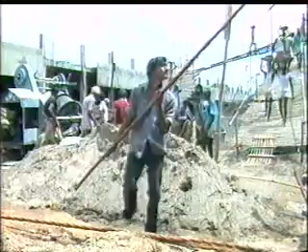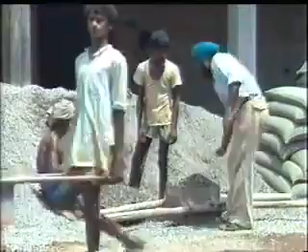Versatile and most useful modern construction material. To achieve the desired structural and functional properties of hardened cement concrete, its manufacture and properties during plastic stage need to be suitably controlled and checked.

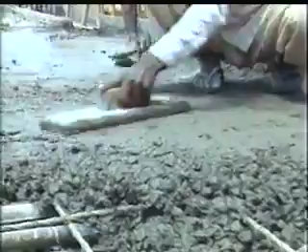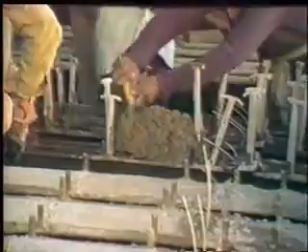The workability is the ease with which the concrete can be placed, molded, and compacted fully in its mold. More scientifically, the workability is that property of plastic concrete which determines the amount of useful internal work necessary to produce full compaction.

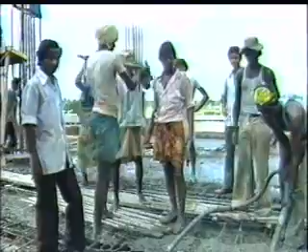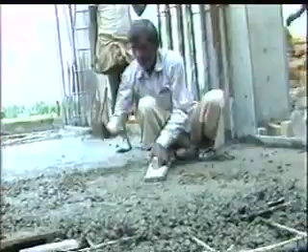Workability is defined as the property of plastic concrete which determines the amount of useful internal work necessary to produce full compaction of molded concrete without any segregation or bleeding. Good workability results in much better compaction and hence dense concrete with minimum air voids.

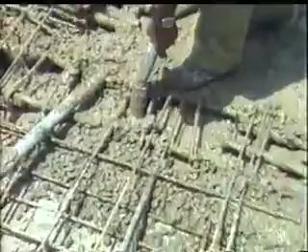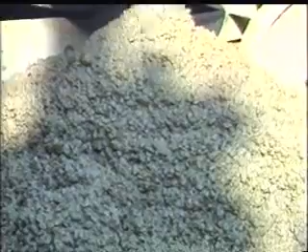The phenomenon of workability is associated with sub-concepts of ease of flow, which indicates flow characteristics of concrete. Prevention of harshness, which indicates surface finishing characteristics. Cohesiveness, that is, prevention of segregation, which indicates homogeneity of concrete.

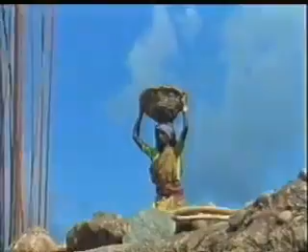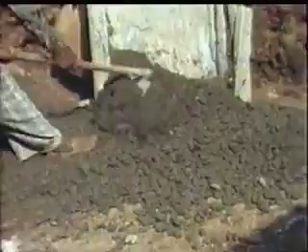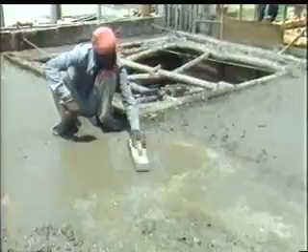Workable concrete mixes should not segregate. Improper handling leads to segregation. Prevention of bleeding, which shows oozing of water and cement slurry to surface. Good concrete mix should not bleed during compaction and finishing.

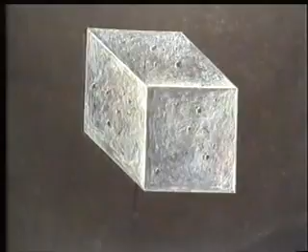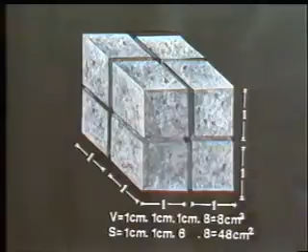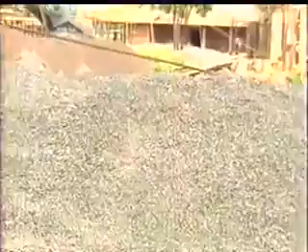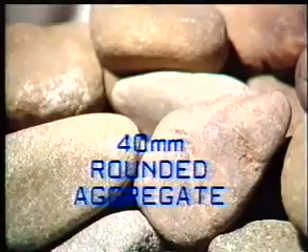The size, shape, texture, and grading of aggregate particles affect their surface area. Surface area per unit volume increases with the decrease in size. Crushed aggregate has more surface area compared to rounded aggregate per unit volume. Water used in making concrete lubricates the surface of aggregate. The quantity of water per unit volume affects the lubrication of aggregate particles and hence the workability.

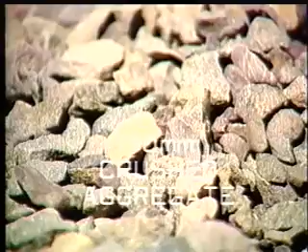Thus, the size, shape, texture and grading of aggregate and quantity of water affect the workability of concrete. For achieving the desired workability, the quantity of water is decided on the basis of size, shape, texture and grading zone of aggregate.

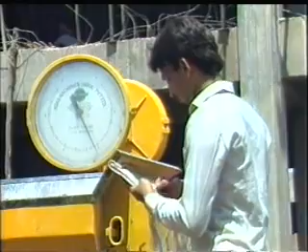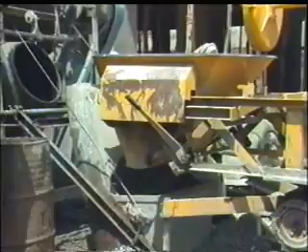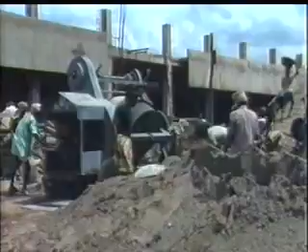To achieve the desired workability, adopt suitable aggregate to cement ratio and fine aggregate to coarse aggregate ratio depending on the sand grading zone, size, shape and grading of coarse aggregate. To achieve economy in the manufacture of concrete or higher yield, the proportion of sand should be just sufficient to produce cohesive concrete mix.

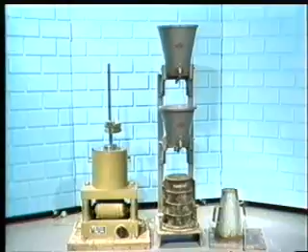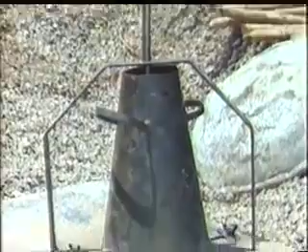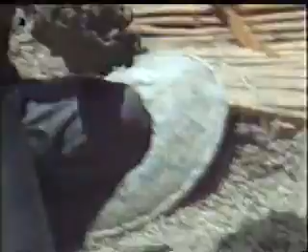A large number of tests are developed for the measurement of workability: slump test, compacting factor test, VB test. Slump test apparatus consists of a truncated cone having 100 mm top diameter, 200 mm bottom diameter and 300 mm height.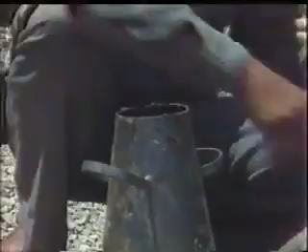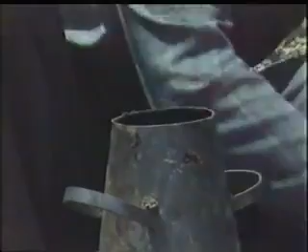The slump cone is filled with concrete mix in 3 layers, compacting each layer with 25 standard strokes of tamping rod.

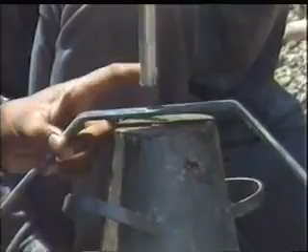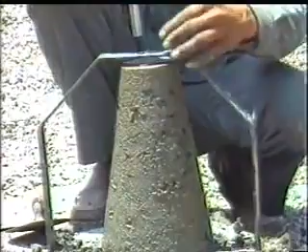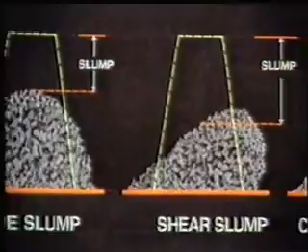The cone is lifted vertically without jerk and vertical subsidence of top concrete surface is measured from the original top face of the cone. Depending on the type of concrete mix, the slump may be true slump, shear slump or collapse slump. The slump test is ineffective for mixes of very low and very high workability.

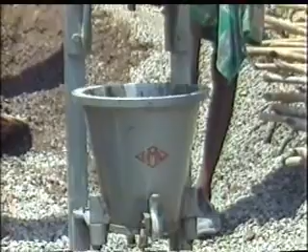Compacting factor test was evolved to relate the external work applied to the internal work required for compaction. This test is very useful, especially in dry mixes.

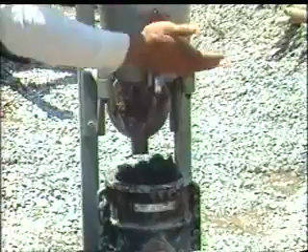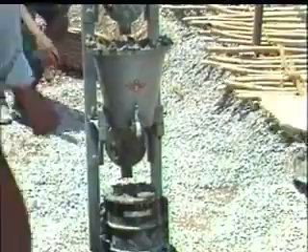The workability as the degree of compaction is expressed in terms of fraction obtained by dividing the observed weight of concrete allowed to fall in the standard cylinder through a standard height by the weight of concrete.

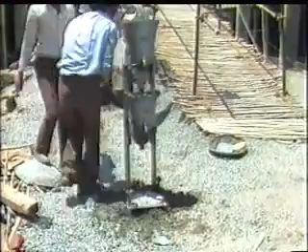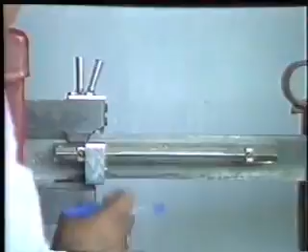Compacting factor is equal to (Ws minus Wo) divided by (Wf minus Wo). Here, Wo is the weight of empty cylinder, Ws is the weight of cylinder and concrete with standard compaction. Wf is the weight of cylinder and concrete with full compaction.

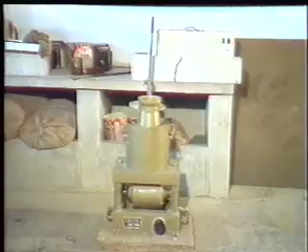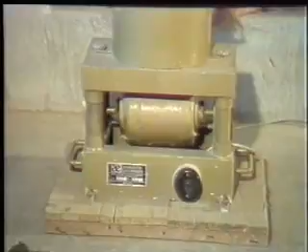VB apparatus test is based on remolding time in seconds of a conical concrete mold to cylindrical mold in a standard vibrating apparatus.

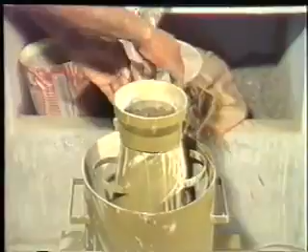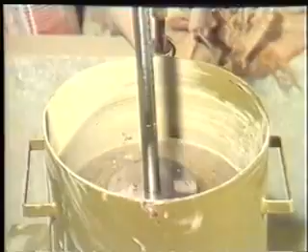The time measured in seconds required to convert conical concrete mold to cylindrical concrete mold vibrated in a standard VB apparatus. VB test becomes ineffective for very wet concrete mixes.

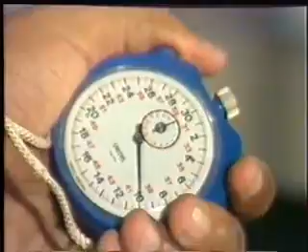Ranges of workability of concrete with respect to placing conditions. Concreting of shallow sections with vibration: workability very low, VB time 20 to 10 seconds, compacting factor 0.75 to 0.80. Concreting of light RCC section with vibration: workability low, VB time 10 to 5 seconds, compacting factor 0.80 to 0.85.

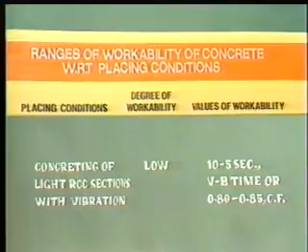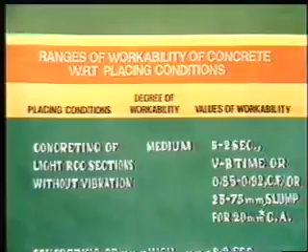Concreting of light RCC section without vibration: workability medium, VB time 5 to 2 seconds, compacting factor 0.85 to 0.92, slump 25 to 75 millimeter. Concreting of heavy RCC section without vibration: workability high, VB time 0 to 2 seconds, compacting factor more than 0.92, slump 75 to 125 millimeter. For smaller size aggregates, the slump value will be lower.

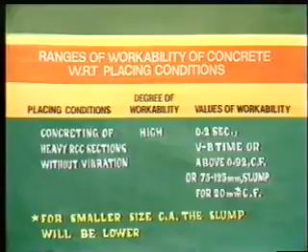Factors affecting choice of workability are: greater the size of the structural element, lesser is the required degree of workability. Narrower the section, higher is the degree of workability required. Higher the reinforcement, higher is the degree of workability required. Where compacting is difficult and done manually, higher degree of workability is required.

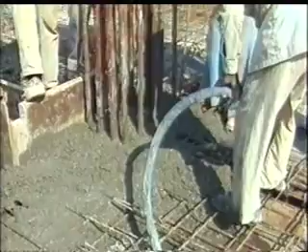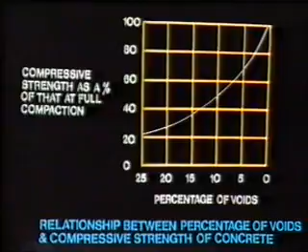Workability is defined as the measure of useful internal work required for full compaction of concrete. Workability property of cement concrete in its plastic stage plays a very important role in molding and compaction, which in turn influences the strength of hardened concrete. Workability of cement is affected by the quantity of water, size, shape, and grading of aggregate.

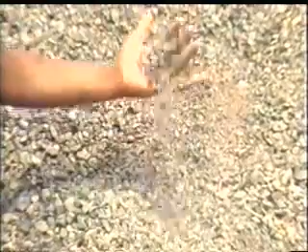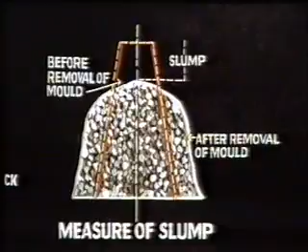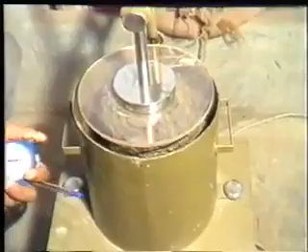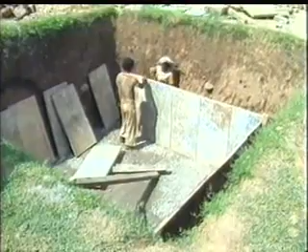Depending on its degree, workability of cement concrete can be measured in terms of slump in millimeter, compacting factor as fraction, or VB degree in seconds. Workability of cement concrete mix should be chosen on the basis of placing conditions, size and type of structural member and method of its compaction.